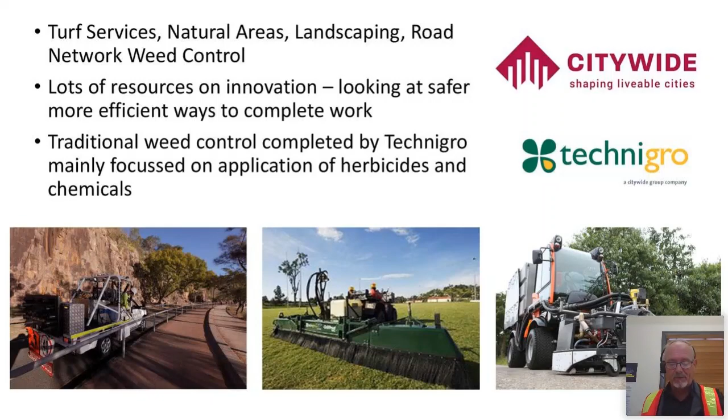As you would be aware, over the years, especially the last couple of years, weed control using herbicides has become a huge topic and extremely sensitive, especially in urban areas. We've continued to look for safer solutions to reduce the amount and types of herbicides we're using while still achieving a good result for our clients, and this has become challenging.

We looked very closely at what is happening overseas in regards to legislation and what equipment was being successfully utilised, and found what we believe to be the most effective alternative to herbicides anywhere in the world, which is boiling water, not steam. So I was then fortunate enough to go to Europe.

I went to review the equipment being extensively utilised, which is manufactured by a company called Heatweed. I spent considerable time with both the manufacturer and contractors who are using the Heatweed equipment, looking at both the quality of the equipment and the results that were being achieved throughout Europe. And what I found, I believe to be amazing. My only real concern was, could we achieve the same results with boiling water in the warmer climates of Australia?

My CEO and board backed my enthusiasm and approved for Citywide to purchase a considerable amount of equipment and bring it back to Australia, which is what we did. They also approved for us to bring experts from Europe. We brought out three individuals to train our staff back in Australia, which took approximately one week.

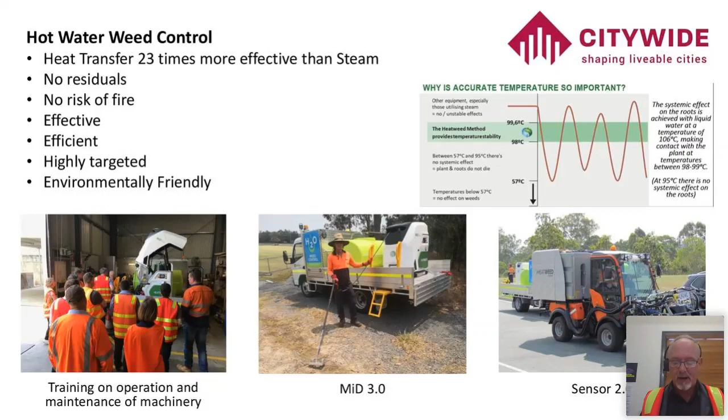So talk about the Mid 3. The Mid 3 is a really well manufactured, compact and reliable piece of equipment. It can be mounted on trucks, trailers, utes, and some ATVs. It has up to a 45-metre hose. It has advanced temperature control, which makes sure the water always remains above 98 degrees Celsius and produces excellent results, and is very, very safe to use.

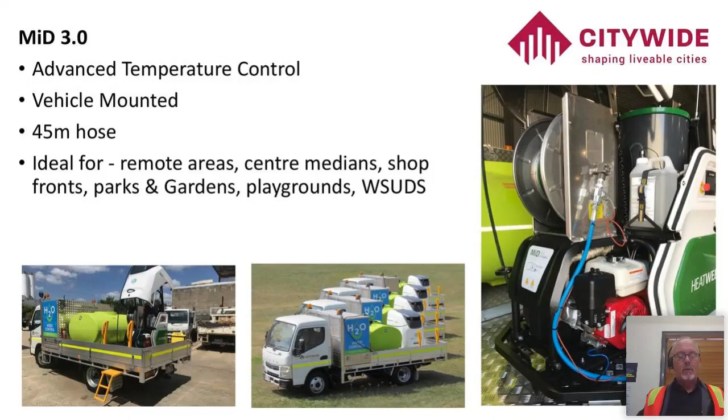The other piece of equipment that we bought is the Sensor 2, which is on the screen now. The Sensor 2 is the larger unit, our flagship. The equipment is really well manufactured. It has patented sensor technology which locates even the smallest of weeds and applies boiling water at 98 degrees Celsius directly onto the targeted weed. It's extremely safe and efficient, and very, very well received by the general public.

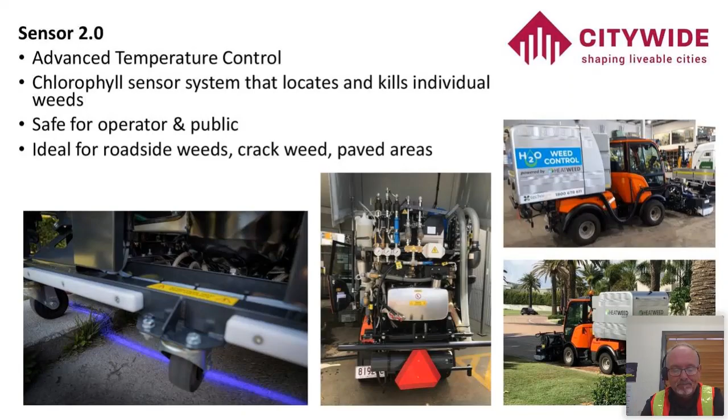So after extensive training by the Heatweed staff back in Australia, we were ready to commence our trial work under Australian conditions. We completed extensive trial work in parks and gardens, playgrounds, water-sensitive urban design areas, hard standing areas and road networks. What I was really concerned about was, I was very excited about the equipment, but would we achieve the same results that I saw in Europe?

I can honestly say the results we were achieving were definitely up to the expectations of myself and my staff and our clients, including Gold Coast City Council, Sunshine Coast Council, SEQ Water, just to name a few.

I clearly remember the first time we actually went out and did this trial work, the smiles on the staff's faces. We'd really nailed it. We didn't miss a weed and we got 100% result. If you look at the pictures on the screen there, you see the water was applied only on weeds. So we didn't miss anything and we got 100% result.

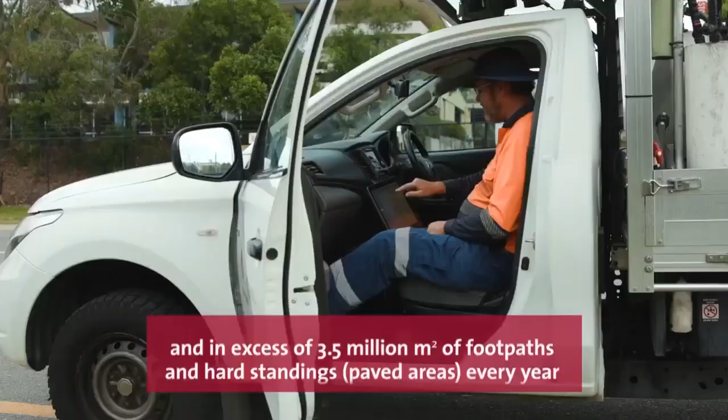Our reporting and our data collection is critical. We know exactly where our staff have been, what roads have been treated, what products have been used. Providing them with the data that we do allows them to know how we're performing. That gives them options in the future so that they better understand the work that we do.

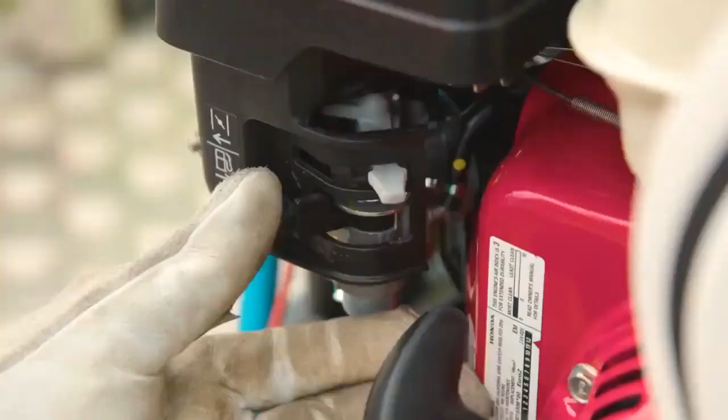We found what we believe to be the safest non-chemical weed control solution available anywhere in the world, which is boiling water, not steam but boiling water. Using hot water to kill weeds, that's just got win all over it for the environment and for the people that are organising the work, ordering the work.

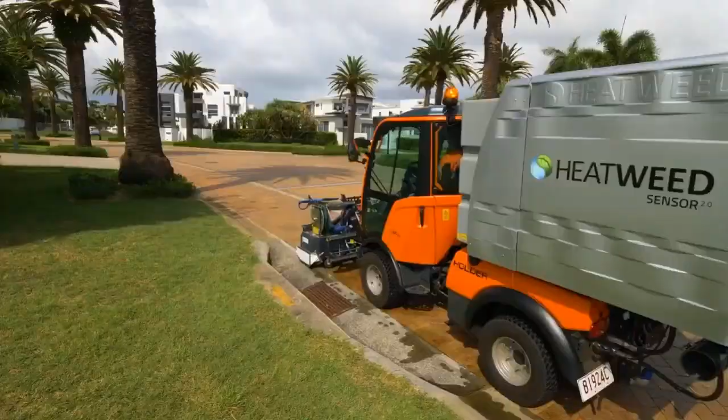Climate change, drought, weather conditions — huge problem for our customers. We'll always go for a safer product, looking at ways to reduce our overall output of products.

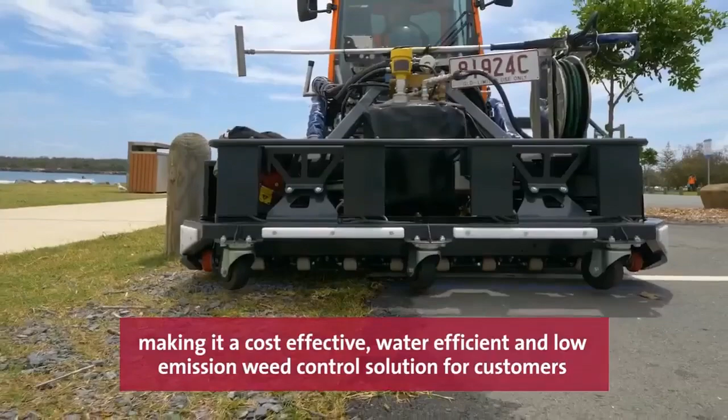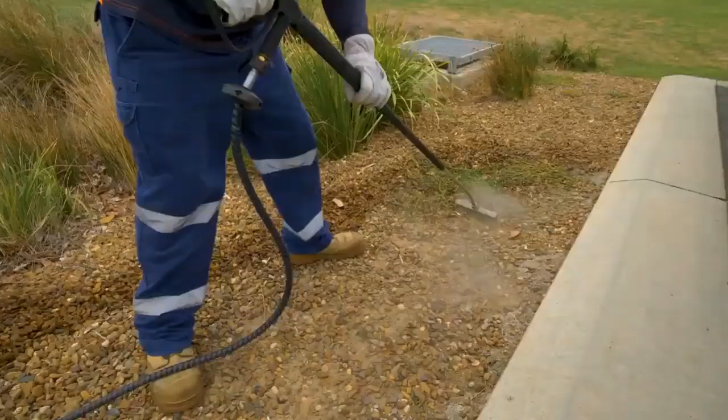Our customers are valuing the offer of hot water weed control because it gives them options, it gives them the capacity to meet problems as they arise. Taking away risk to our customers is very important.

We've spent a lot of time working with the industry's best to make sure that we're a step ahead. We were closely involved in the innovation around building the safety cell. The safety cell is a vehicle that keeps our staff extremely safe when working on roads.

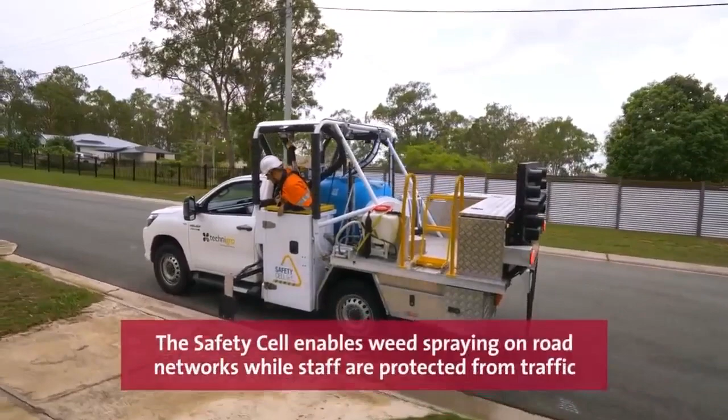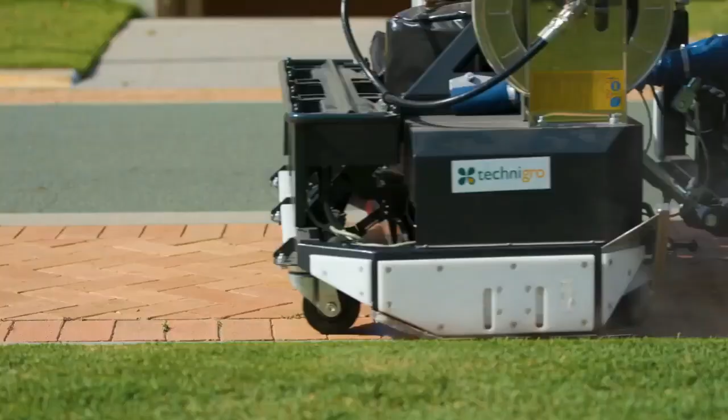Customers are always looking for better ways of doing things, safer ways of doing things. It is about having the full suite of tools. Weed control on road networks is a really, really important service that must be provided. At the end of the day, we're trying to give our customers the best result with the safest outcome at all times.

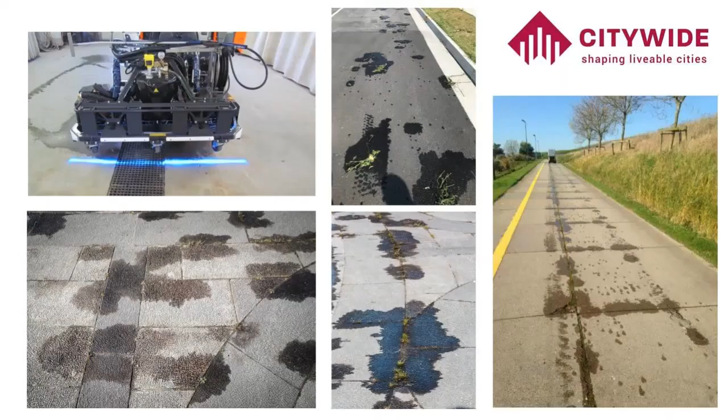Hi, good morning everybody. As Kim said, I'm Dave Hart and I've been with Citywide for 17 years, the last 10 or so as leader of what we call our landscape and roads division.

We provide services in most areas of vegetation maintenance, but where we've traditionally tried to focus is the area of urban weed control in parks and road networks. That's probably where we're best known and where we consider ourselves to be one of the best, if not the best.

One of the main contracts I run, and that we've successfully held for many years, is as the supplier of herbicide application services to Brisbane City Council. This contract involves a significant quantity of work. In fact, if we joined all the spraying work we do in curbside, channel and footpath that we conduct in one year, it would go around the world twice, in fact more than twice.

Added to this, of course, is the thousands of hectares of weed control we complete in turf and gardens.

A big part of my role in relation to this contract is dealing with complaints from the public, especially regarding chemical use. We give our guys a handout sheet that explains what we're spraying, why we're spraying it, and it should alleviate the concerns of residents. But if they've got a bee in their bonnet about chemical use, I end up getting a call anyway, and quite often those calls aren't pleasant to deal with.

So I can say, as the guy at the forefront of one of the largest urban weed control contracts in the country, the public concern about chemical weed control is growing, it's getting worse. At Citywide, we like to think of ourselves as being a pretty innovative bunch, and we're always looking for greater safety and efficiency in the way we deliver our services.

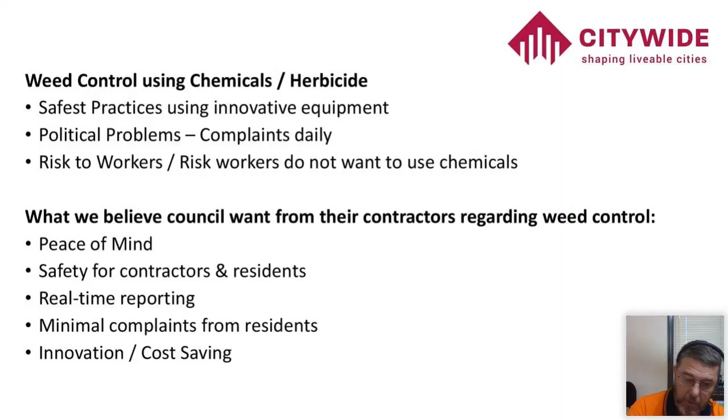I'm quite fortunate that my team and I have been given some wonderful tools with which to achieve that. I'll just quickly touch on a couple of examples of those, if I may, that reflect the attitude we have in wanting to be innovators in our space.

The first is this bit of kit, you saw it in the video before - it's the safety cell. We've got a couple of these, they're Department of Main Roads approved, and we use these units to complete most of our work on both major arterial and minor residential roads. We've got them operating day and night, and they complete a huge quantity of work far more safely and far more efficiently than we otherwise could achieve.

And of course, that leads to savings that leave our customers pretty happy as well. As you can see, it's got two steel cells that the operator can stand in, one on either side of the vehicle. From there he can safely access the curb using either a boom, a lance or a gun, and the same on the other side, on the driver's side, where he can treat center medians - and of course, center medians are a dangerous place to be.

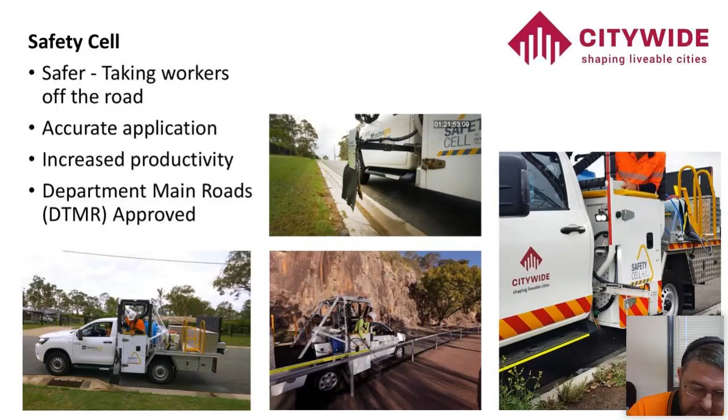Another innovation we're quite proud of is our drift-proof technology. This is developed in-house for our use. It's got a super light footprint, uses very low quantities of water, and allows us to selectively treat park turf without any chemical drift, far more safely and efficiently than we otherwise could. It gets a great public reaction and it's a major tool for us.

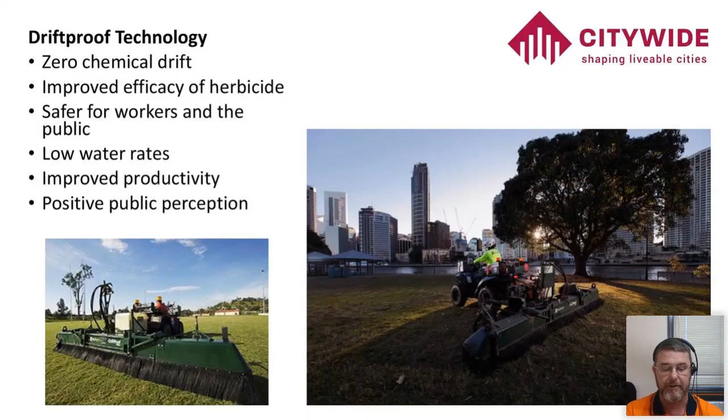It's a clever combination of our field staff completing reports digitally, which then has selected pieces of data uploaded to what we call our customer portal. The selection of that data depends on what the customer wants to know, because that data is then turned into some pretty clever reports.

With this, our customers can see the progress we have in our works. They can even see maps of what areas have been treated and what areas haven't. We also contain within this our forward planning, so not only can the customer see what has been treated, they can see what's going to be treated and when.

That's important because we encourage our customers to make sure anybody answering the phone has access to this. That way, if a resident rings up with an inquiry or complaint, say about when the weeds in their local playground are getting treated, they can quickly look it up and see when it was last treated and when it's next due as per the program. That means the resident gets an answer immediately, which always leaves them happier than being told someone will get back to them.

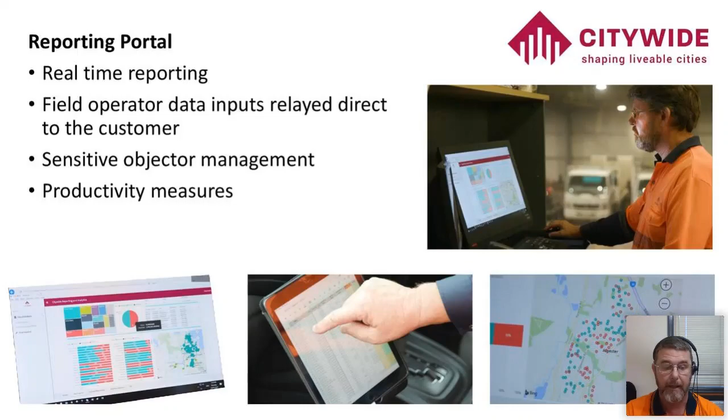And so that brings us to our latest innovation, the Heatweed equipment. Obviously we didn't develop this - it's made by some very clever people overseas - but we are the ones who have brought it to Australia, and we're very proud of it.

I've become increasingly impressed with this gear the more I use it, and by that I mean the more I've worked with it, the more I've come to understand the importance of the factors that make it different to other similar gear out there. We know there are other systems out there, but none of them gave us the confidence to invest heavily as we have with this equipment.

Two of the biggest standouts for us when investigating thermal weed control options were the sensor technology and the computerized temperature control this equipment has. The more we've looked into this area, the more we've realized how critical constant temperature control is, and the Heatweed gear gives us that.

Having this equipment now provides me with a strong sense of comfort, knowing I have an option we can offer where chemical control is not possible. It eases a lot of the stress that's been building in our industry and with contractors since this public groundswell against chemical use started gaining momentum.

Especially since in the past we've trialed a lot of different things, compounds that had that organic tag, but really posed a significant risk to us or the environment, and generally didn't work anyway. So we've been searching for alternatives for many years, and it gives us a great deal of confidence to know that we've now got this.

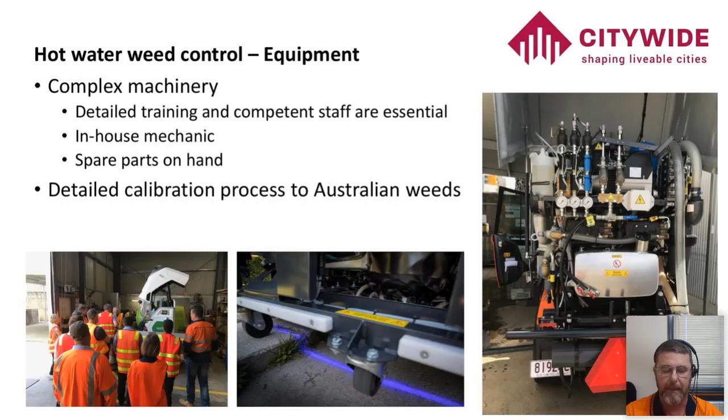As for the machinery itself, we purchased two different models. The first I'll talk about is the sensor.

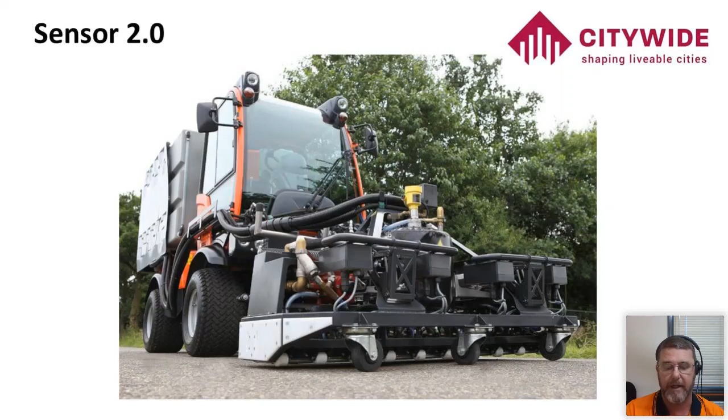It incorporates some clever sensor technology. It's a big piece of gear, and as you can see in the slide, it has to be mounted on a tractor unit. We've got ours on this flash holder unit.

The way it works is, as the unit travels along the ground, the sensors detect the chlorophyll in the weed, and the dosing unit dispatches a measured quantity of water to the weed out of one of the nozzles. There's about 40 of them across the underside of the machine.

We had to go through a lot of effort to get this machine working properly. The designers built a huge range of options into the software. One is that the sensitivity of the sensors can be calibrated for detecting different quantities of chlorophyll in the weed. This is so that if the weed is in poor health, the machine doesn't waste water, diesel and time reheating water in treating it. The assumption is that if the weed is in poor health, it's probably on the way out anyway.

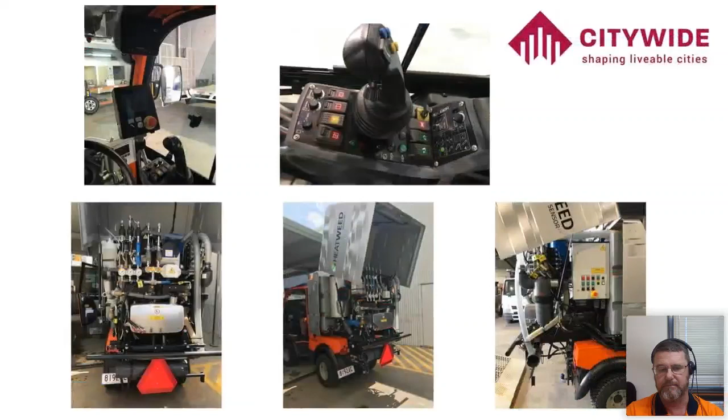In Australia, with our hot, dry climate, our weeds are under stress anyway. So we run this on the maximum setting to pick up the slightest hint of chlorophyll and nail that weed, depending on whether it's healthy or under stress or whatever. Another setting was in relation to the quantity of water applied.

Our weeds are tough, and they're seemingly getting tougher each year as glyphosate resistance gets worse. So we run it on the maximum water setting. But even with it set to maximum output like this, it's still using a lot less water than other machinery out there that's having to do a constant blanket spray. This is only spraying where the weed is, so in total volume of water used, it's using a lot less, even though we're putting a lot on the weed.

If we want to, and we do use it like this occasionally, we can set it to continuous blanket spray, and that's something we might do in really messy paved areas. Fantastic for that. But generally, we let the sensors do their job and minimize the amount of water that we're using.

The last thing we had to learn with this bit of gear was getting our speeds right, and that we've learned is critical. We've learned that the weed density, and more importantly the maturity of the weed, dictates the speed at which we can work.

This has come back to where we've given our operators plenty of time to get used to it, to learn how to use it, to gain the experience, and the operators are critical. They know where they can speed up, where they can slow down, what species of weed, what level of maturity the weed is, and get the best out of the machine productivity-wise.

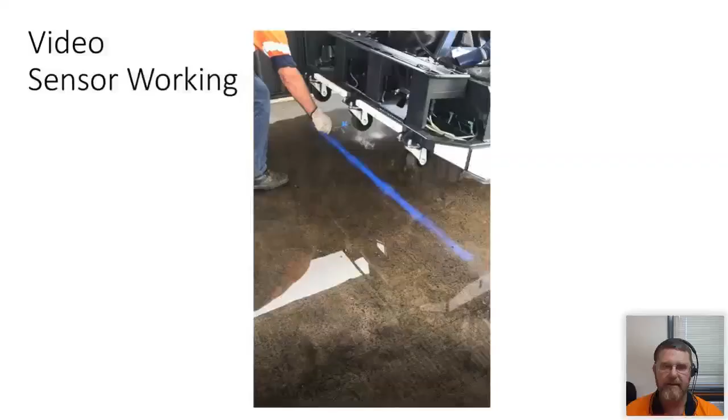Seems to be some difficulty getting that video to come up. We might just have to skip that for now.

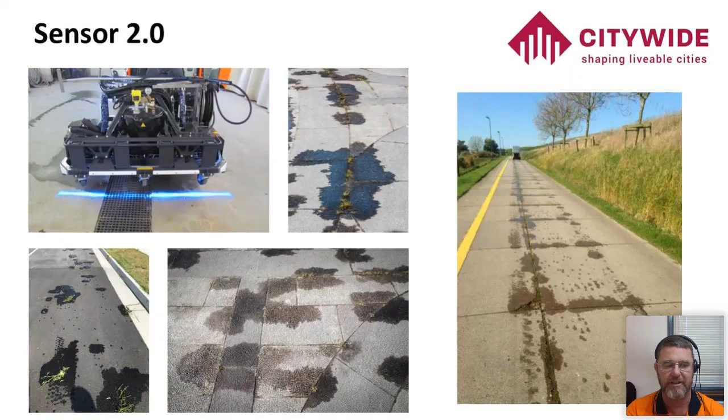The other type of machine we are using is called the Mid 3. This machine provides greater flexibility in the sensor unit, but does require a greater level of input from the operator.

We've put ours on small trucks with a lot of storage space and a large water tank on board, but the machine itself is not that large. They have a range of hand tools for different jobs, allowing a more targeted application for garden beds or anywhere the big machines can't get into.

We've got 15 meters of hose on a retractable reel. We can add more hose in 15-meter lengths, but every time we add another hose, we've got to tell the machine, because it's so clever, it heats the water up a little bit more with each hose to account for the heat loss as the water goes out the hose to the tool. So again, this is a very clever machine, just like the sensor machine.

The different tools vary in widths. Some have wheels, some don't—wheels for working on curb and channel, without wheels for in garden beds. It also has a pressure switch, a pressure variation that we can turn. When it's operating controlling weeds, it operates on a really low pressure. It's very safe; the hoses are of really good quality and the pressure is very low.

But if we want to, we can turn it up into pressure washer mode, and we have a pressure washer lance that replaces the weed control tool. It changes very quickly at the flick of a switch, and we've been using that for cleaning bins and tables and barbecue surrounds, that sort of assets within parks. It does a really, really good job.

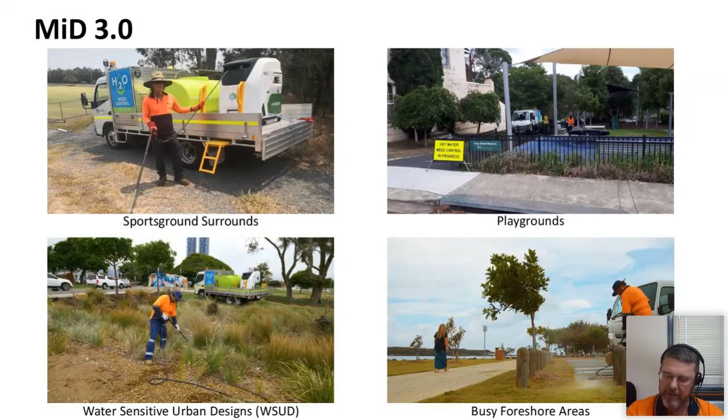Now, the big question with this gear is, does it work? And is it killing the weeds, including the roots? And I can say, yes, it does. But I need to qualify that.

Where you use it in locations that have had responsible weed control conducted at regular intervals in the past.

We found it's a bit slower than chemical spraying, but not overly so, and it's pretty easy to get a good result. However, if the area's been neglected because spraying hasn't been permitted, then expect it to be slower.

We've been given some really awful sites, and we found that while the follow-up treatments have become increasingly quicker, those first treatments haven't been fun, and that makes sense. We're effectively cooking the weed, and the volume of material we need to cook determines the treatment time.

What we have learned is that whipping away most of the top growth, coming back in a few days' time and treating that growing crown makes the process much quicker, much easier. There's a lot of science behind this.

We've learned that hot water is far more effective at transferring energy than other forms of thermal weed control, including steam. And look, don't confuse this with steam.

Don't confuse this with steam weeding. It's not the same thing. That's one of the things we've had to get clear with a lot of customers. It's not the same thing.

This is hot water. We know that if we put enough hot water at the right temperature, we can destroy the cell structure of the plant, including the roots, and it will dry up and fall apart.

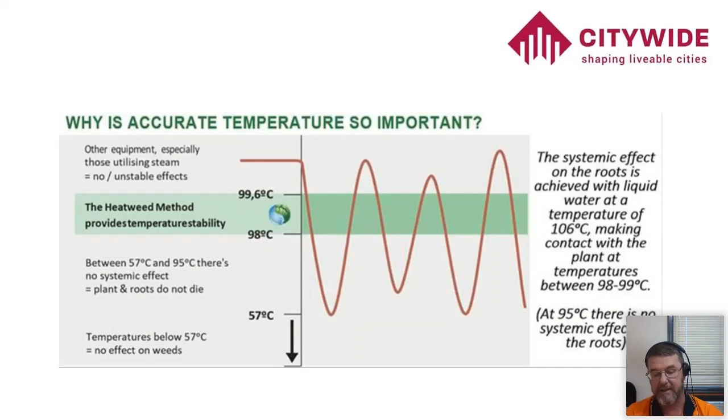And again, that temperature bit is so important. If the temperature drops by even a couple of degrees, we don't get the roots as well. That's why I keep mentioning how this gear consistently delivers that high temperature. The consistent high temperature is the secret to success.

And of course, after having worked with it, we know that if we can destroy what's above the ground at the right temperature — and I mean not just annoy it by burning it, but physically rip the cells open — we virtually always get the root as well.

There's been some exceptions to this, and they've been weeds in neglected sites where we've had to finish them off on the following treatment because they're just really big, hard weeds. I'm talking about weeds here that glyphosate would have struggled to get as well. So I don't see that as a big problem.

A couple of benefits that we found with this gear that we're loving: the results are really quick, really quick. Most times the weeds are dead the next day or the following day. Go back a week later, 10 days later, and you can't find them. They're just gone. They're falling apart and blown away.

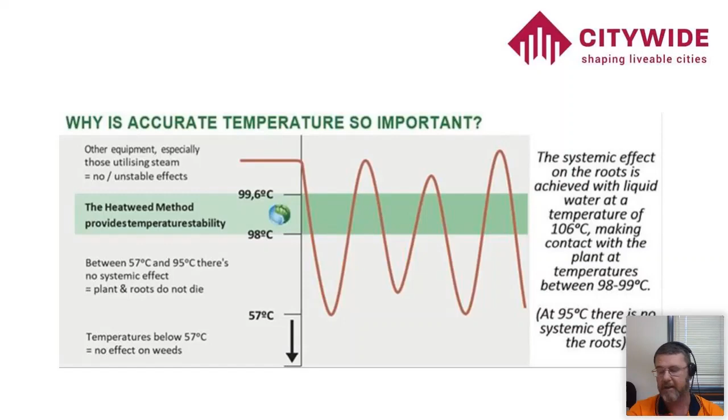And that's great because we know standing dead weeds trigger complaints, sometimes more complaints than green weeds do. So that again is a lessening of complaints.

We've also noticed an improvement in the health of desirable plants in the gardens we treat. We were given some awful gardens to work in, and one of the things we noticed in a lot of these gardens was that they showed a lot of...

damage that obviously had some clumsy glyphosate or other chemical applications in them, and there was a lot of missing plants, with a lot of damage to the plants that were there.

Since we've been treating these gardens with the hot water, they're picking up. They're looking fantastic, way better than they were before. And we're putting that down to the fact that there's just zero chemical drift in there.

They look fantastic. And lastly is the results we're getting on glyphosate resistant and tolerant weeds. We're killing things like fleabane and pigweed without a problem.

Whereas in the past, they and a number of other nasty weeds required some pretty aggressive chemistry that just wasn't suited to public spaces to control them.

And of course, when you're working on roads, roads are drains. They lead to other drains, which lead to waterways, so you've got to be careful about what you're putting on those. So often you can't use those other chemistries to control those harder weeds.

And I've noticed over the years these weed problems are becoming more prevalent. Weeds that a few years ago were a problem, like crow's foot or wiregrass in our gutters, they're getting harder to kill as well. It's just getting harder and harder with chemicals to get the job done.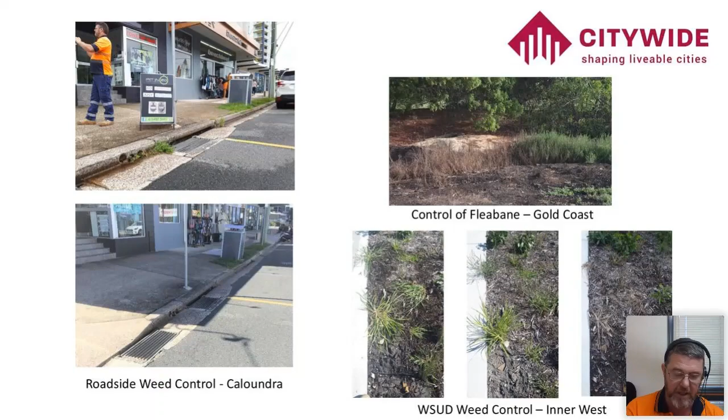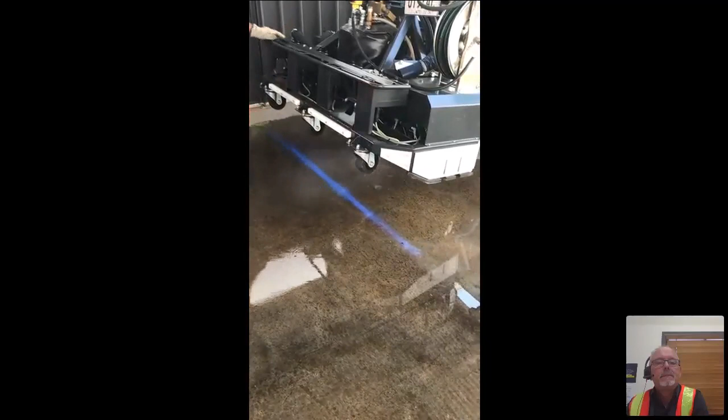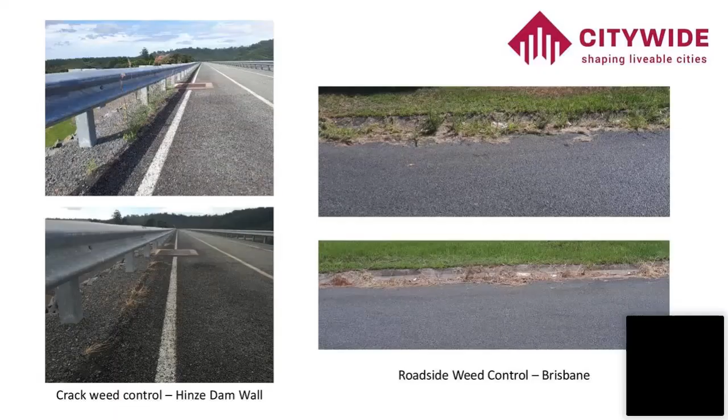Yeah, that's just some video he took. The mechanic is just putting a small weed under the sensors, moving it from side to side, and showing you how the sensors pick up the weed, very, very accurately. Again, thanks for that, Dave.

So finally, we're running out of time here. I'd just like to discuss briefly a contract we were recently awarded for Inner West Council in Sydney for 5 years. The contract is for sensitive weed control in sensitive areas. It was very interesting for us to see this contract come out, because I was a bit unsure of how council would approach the reduction of herbicides.